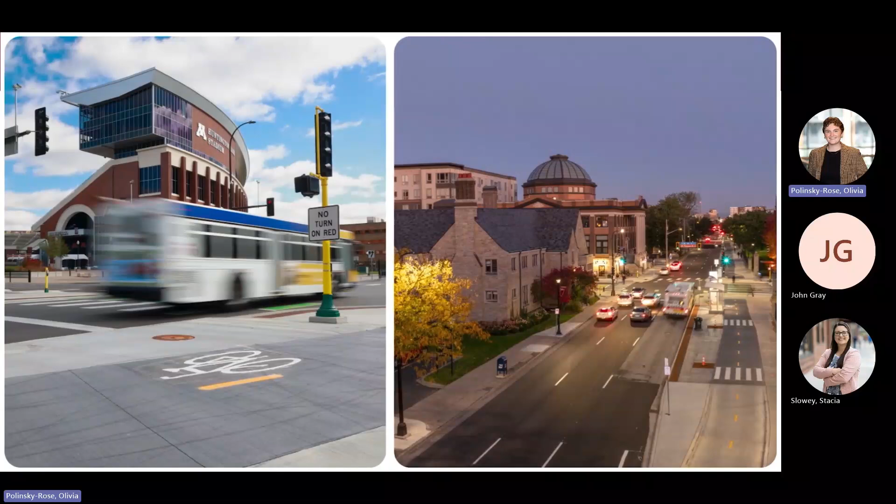So I'm going to go through the overview of the project as a whole, ultimately arriving at what the goals of the project were. Then I'll go into some more detail on the traffic components, the traffic analysis piece. I did dip my toe a little bit into some of the final design, not a lot — I wasn't really involved heavily in the roadway design piece of it. And with a project this size, I was scratching my head at what the right number of key takeaways were. I came up with a few, so we'll go through those at the end.

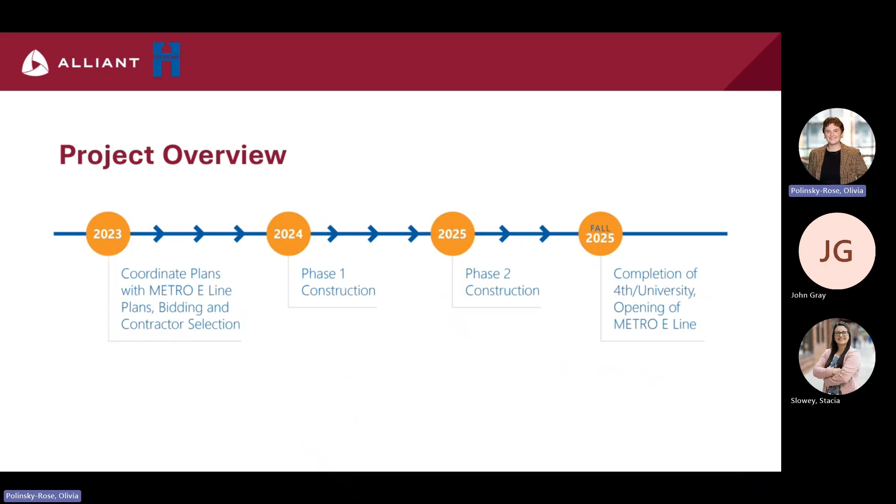So I talked about those existing conditions, just maybe hinted at it a few minutes ago. I want to set the stage for at least what I was getting involved in when we won the project and were starting our preliminary design. So like I said, the first thing to see here...

Back in, I think it was 2012 or 13, I was looking back at street view. The city painted on-street bike lanes, but they weren't protected in any way. They weren't delineated with particular delineators or anything. So given the volume of users out there, it seemed to be a fairly uncomfortable facility. That was one of the driving factors behind the project.

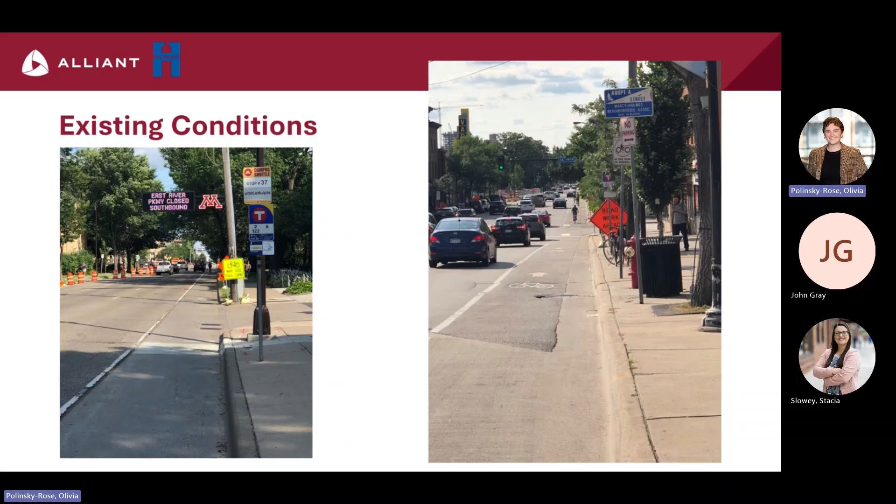The next thing is that there are spots along these two corridors that didn't have ADA compliant pedestrian facilities. These are wonderful examples, I guess, but you get the picture that everything out there is just kind of dated, needed to be refreshed.

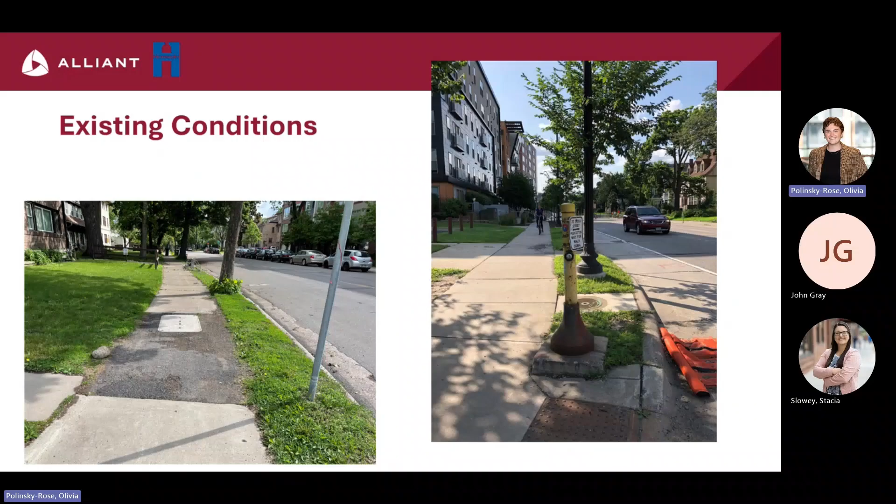This really surprised me when I did a field visit to scope out the extent of the condition of the traffic signals. I came across the pole base here on the right. I could put my whole hand in through the underside, and if I wanted to grab the wiring in there, I could. Not the safest thing out there, that's for sure.

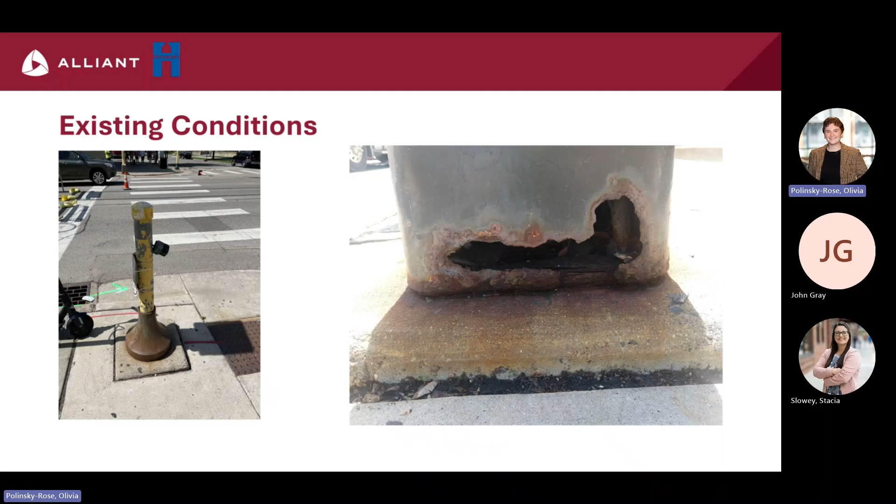A lot of these signals were built in the early 90s, so they're pretty much at the end of their useful life. So not surprising that we want to come in and replace a lot of those.

The last thing is with a corridor of this age, you can have a lot of portions of the roadway that don't have great pavement or even curbs and that. Certain places are kind of a checkerboard of pavement patching and rehab that certainly could use a refresh.

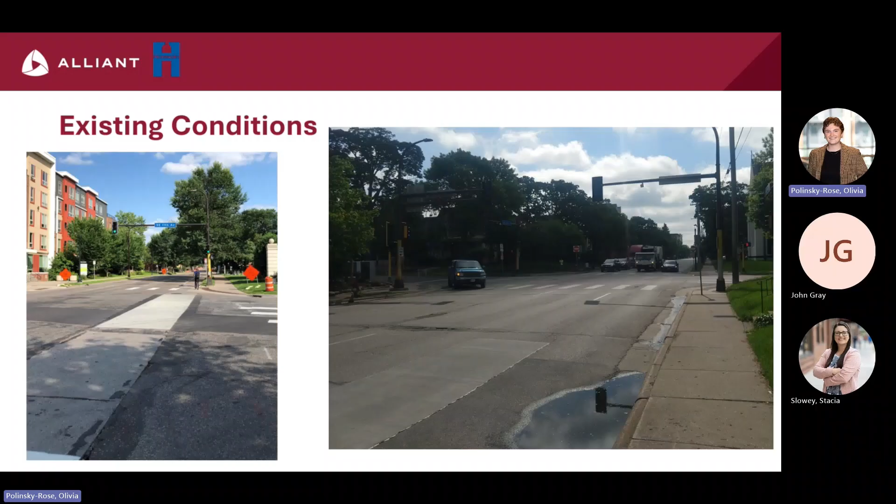Obviously, with this being outside of the University of Minnesota campus, you're going to find a lot of different transportation modes. Of all the projects I've worked on, this has by far had the most complex number of transportation modes. The picture here, I love this picture because you have probably about three-quarters of them.

I think the point here, though, is that all these different modes mix between being on the roadway and being on the sidewalk, or being on the bicycle facilities that were there before we started the project.

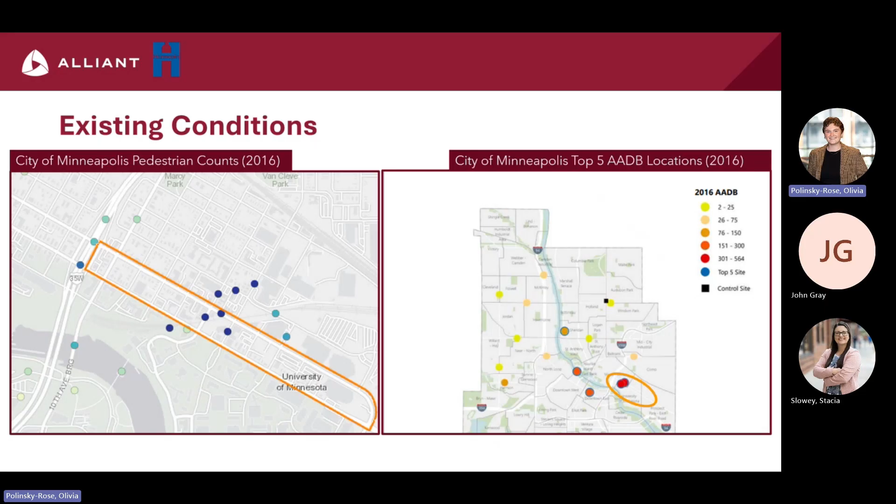Another driving factor behind this project was to provide connectivity to some of the other neighboring or intersecting bicycle facilities in the city, most notably the 10th Avenue bikeway, as well as the proposed future connection to the Oak Street bikeway. The proposed protected bike lanes on University and 4th would provide some of that connectivity for those users.

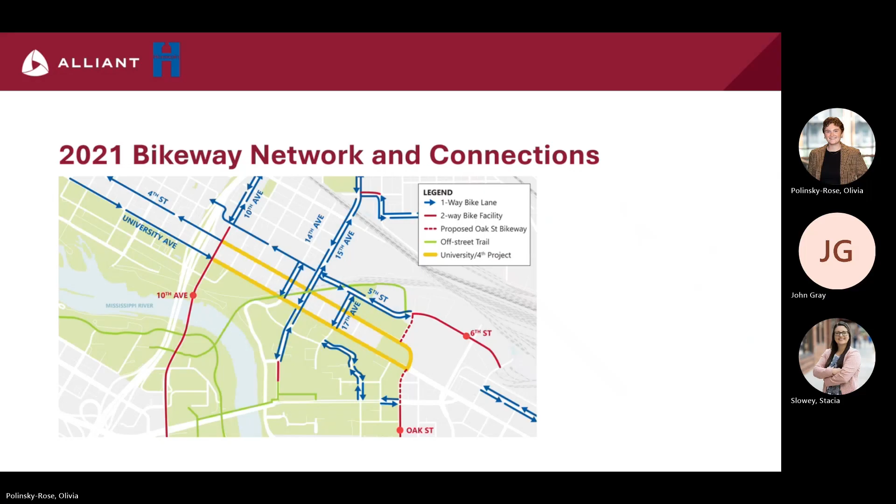Like I said earlier, going into the project, the county knew that Metro Transit was planning to operate the BRT along University and Fourth. There were 3 proposed stations at the time - and when I say at the time, I mean the preliminary engineering phase. Obviously we know the E-line opened late last year, but at the time there were 3 proposed stations along our 2 roadways. So we had to work closely with Metro Transit to include the BRT in the traffic analysis, and then ultimately incorporate some of the things Metro Transit needs for BRT in the final design.

So all this kind of culminates in what the project goals are. When I try to come up with these goals, it's pretty simple to say: we want to improve bike mobility, we want to increase access to transit, we want to enhance the multimodal safety of the corridor - all in balance with each other, with trying to retain effective traffic operations.

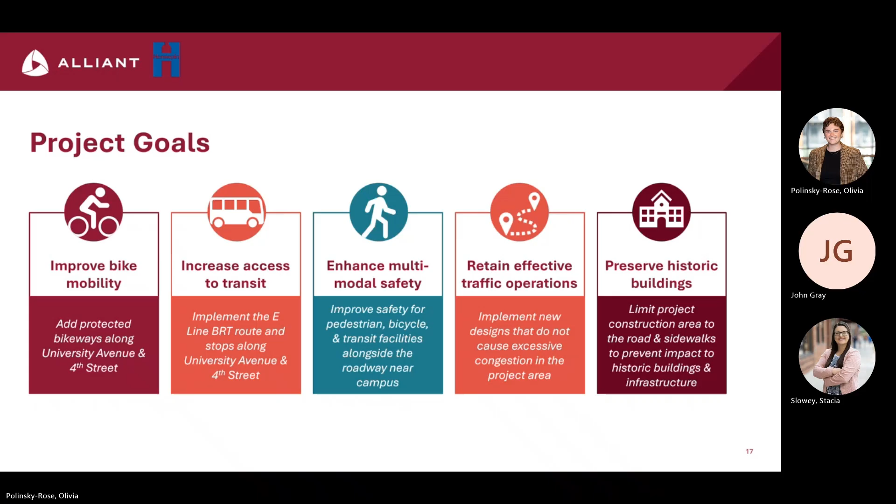So a lot of those goals really center around the complete streets concept. I found this picture that we took - I think in summer 2019 when we were pursuing the project. It really struck me how dominant the motor vehicle space was out there. On the right, I clipped the image of the city of Minneapolis's road priority pyramid, I guess you want to say.

Because these facilities were built or last reconstructed in the 90s, complete streets really weren't a big thing then. They did have facilities for pedestrians and bikes, but it was more auto dominated. This is a great example where you see that bus on the left at the bus stop actually encroaching onto the bike lanes that were there at the time. So in Minneapolis's priority of modes, we really want to try and provide more space for bikes and transit, maybe not have them competing for space if we can. Hopefully that makes sense about the complete streets piece of it.

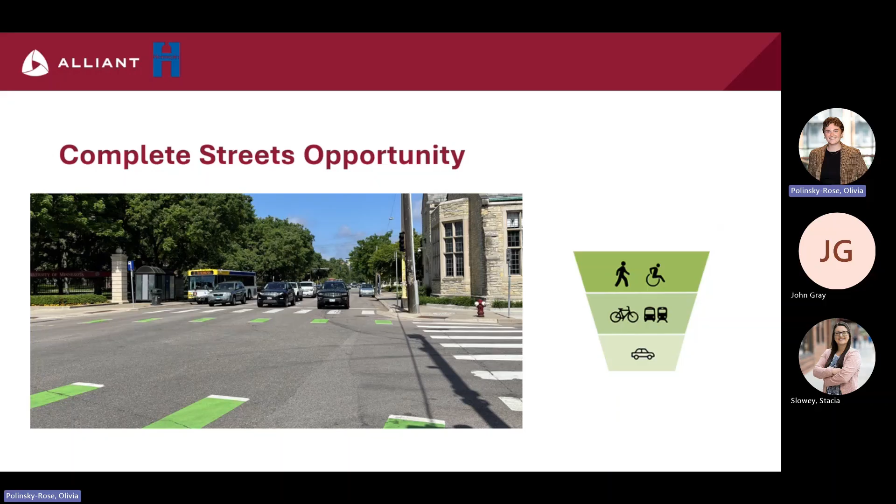We're going to come back to this here at the end. So I'm going to go through the traffic analysis, do this somewhat quickly, but we had a data collection component to this, a big traffic forecasting component, and then a pretty large component of trying to analyze alternatives.

So we'll start with the data collection. It's pretty easy, everybody remembers this time in 2020. I distinctly remember sitting at the U of M for the kickoff meeting right around this time, late March. It was mid-March, like 3 days later the whole world changed.

In my scope, I had asked to collect multimodal turning movement counts in like April. So we went out there to put our cameras out, and my data collector said, well, not a whole lot of traffic out here. I'm like, hey, right. That was a big deal.

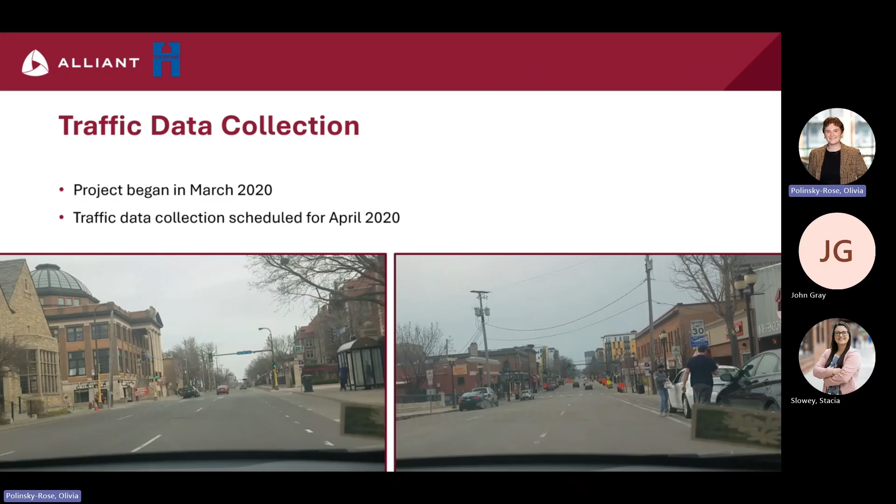In all reality, I had this person go out and just observe what was going on. He didn't have all the cameras. I knew it wasn't going to be what it normally is, but we kind of wanted to gauge if it was going to be worth it or not. It certainly wasn't. I think these pictures were taken around 9 a.m. on University, which usually it's really busy.

So we decided to try and pool together resources from the University, Parking and Transportation Services, the county, the city, or anyone else that had count data we could use for this. We were able to locate some historical count data from 2016 as a stopgap. We also pulled historical count data from the city, and when we plotted that out, it was kind of interesting to see how traffic volume out there was either kind of steady or slightly declining. That was a big point of conversation amongst the stakeholders.

What we decided to do was take the 2016 counts that we had and just increase them by 0.5% annually to get out to 2040, to have a conservative analysis. In all reality, with things declining out there and improving access to transit and promoting the bike facilities, it's probably going to continue to decline a little bit.

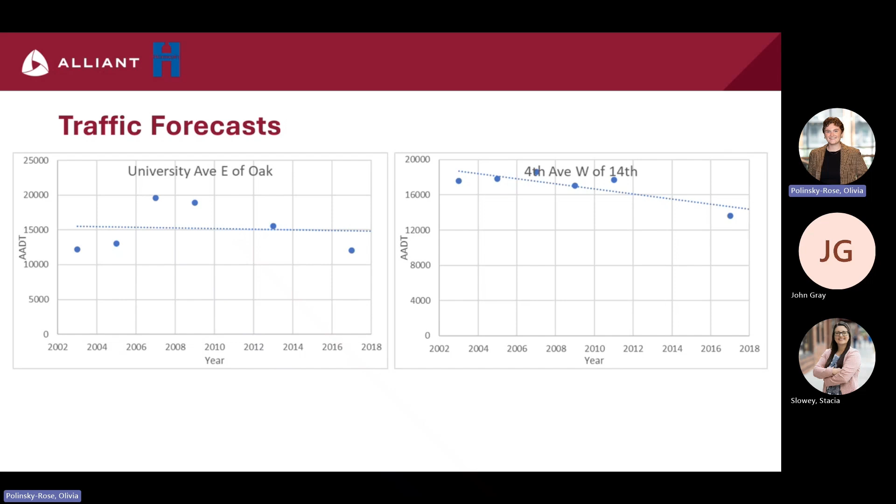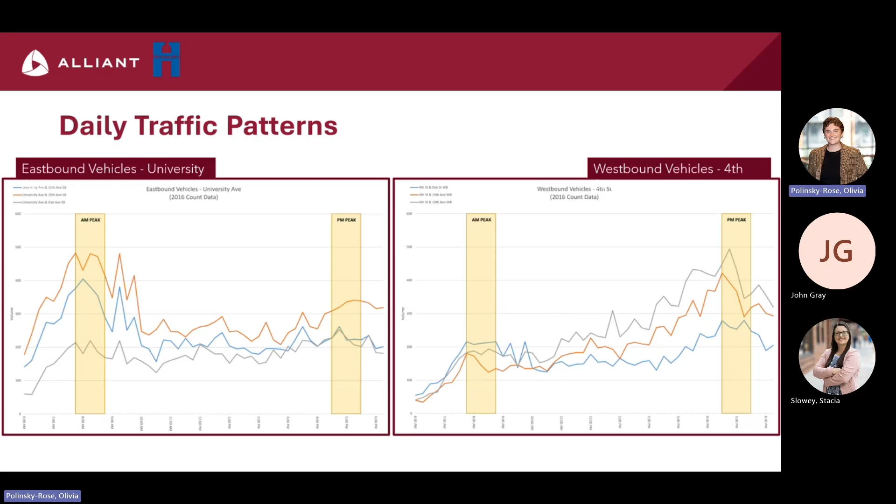What the takeaway here that I saw though was how University volumes tend to jump up very early in the day. They do drop off, but it kind of maintains a fairly steady rate. Fourth Street is a little bit different, where volume starts out pretty low in the day and it just creeps up throughout the day before it cuts off. So just a few takeaways on the traffic piece, traffic patterns.

The big thing here is when we got to the second alternative that we wanted to investigate, that was a lane drop at 15th. So the county and the city were interested in trying to do some sort of a road diet. They thought, well, maybe we can carry 3 lanes from 35W to 15th and then drop a lane at 15th and have 2 lanes continue to the east towards Oak.

With that particular scenario, we analyzed it in Synchro, and the model basically locked up. It couldn't even run because it was so over capacity. So I really said, well, maybe that's not a good idea.

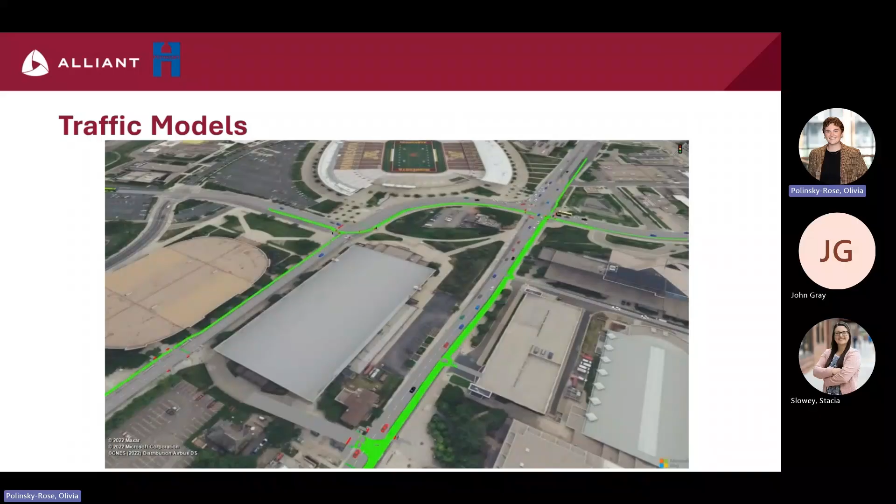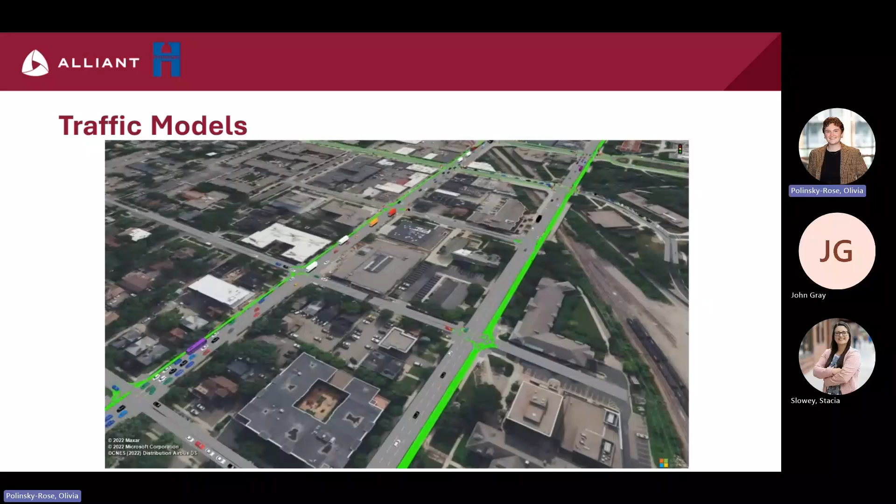Problem with Synchro, though, like everybody knows, is you can't model BRT, can't really model bike operations like this, and it doesn't handle a lot of pedestrians very well. It's really meant for vehicles. So we did Vissim to try and get a better handle on what we'd potentially be dealing with for the proposed alternative. Vissim is very user-intensive, a lot of inputs have to go into it, but the more effort you put into it, the better results you get out of it.

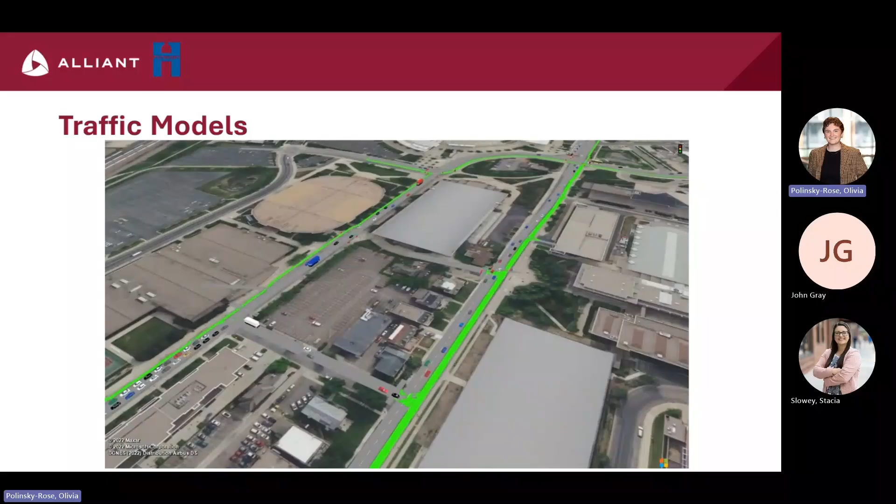It turned out pretty good, and we used this video for a few of the public outreaches we had for the project. So, the two-way bike lane.

There are a couple of considerations we had to think through with this. On one hand, it was a really great idea to start thinking about converting University in our minds from the one-way concept to the two-way, because the city and the university had noted there were a lot of contraflow riders in the bike facilities there before we got involved. So the two-way can certainly help those wrong-way riders, provide them a safe place to operate, and allow better connection to the other bike facilities I mentioned before, as well as those university destinations.

Challenges though, safety is a huge thing. You're dealing with contraflow of bikes with a really busy street right adjacent to it. Certainly invites a lot of opportunity for conflicts, and the intersection operation is kind of complex.

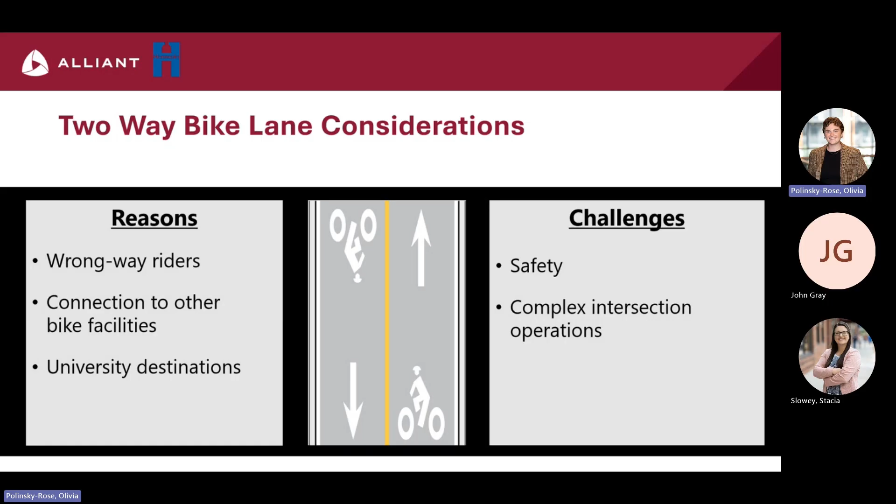The first was to essentially do nothing out of the ordinary that we would normally do, aside from providing a few red, yellow, green vehicle-type indications for contraflow bikes. So if you're going in the direction of vehicle travel, you'd see the regular vehicle indications and ped indications. For contraflow, you'd see vehicle indications and the complementary ped indications.

The second option we thought of was to incorporate bike signals, bike indications. It'd be very similar to option 1, except instead of having red, yellow, green indications for the bikes, we have red, yellow, green bike indications. The way that would operate per the MUTCD would be to have vehicles accommodated through signal phasing, and then have the bikes be in their own exclusive phase, because you can't have a green bike indication on with a green ball.

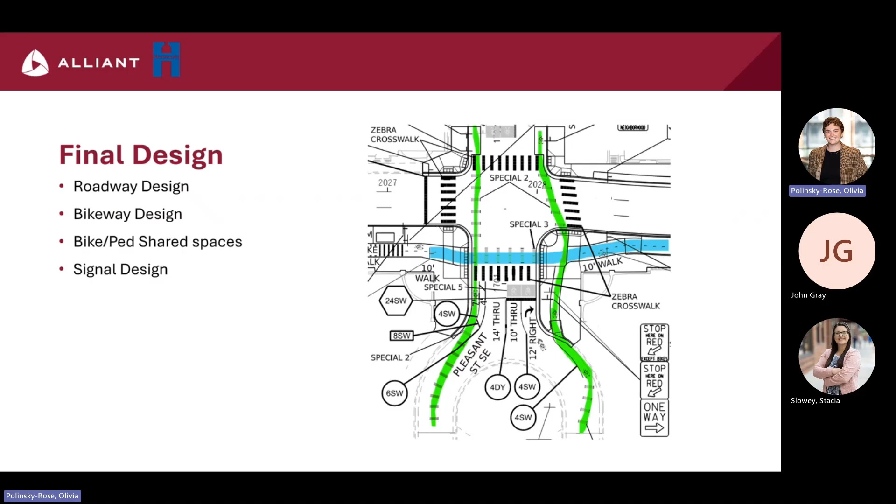So I'm going to move into final design. I thought I had a picture on the slide — I guess it's missing. Oh, there it is. Okay, we're going to go to final design. I'll talk quick about the roadway design piece, bikeway design, some of those bike-ped shared spaces, and signal design.

So we fast forward into final design, trying to figure out all the dimensions for all of our elements. We ended up with 3 travel lanes for University — it seems like almost every block has a different cross section. With the 3 travel lanes, we have the two-way bikeway on the south side, 10 feet wide with a 2-foot buffer, and then we have those 6-foot sidewalks.

We also have 4-foot boulevards on either side. We were kind of going between what the county really wanted for a cross section, what the city really wanted, and what the state aid minimums were for all these things. It's kind of a circus, but this is what we ended up with for University.

At locations where there's an E Line BRT stop, we've eliminated the boulevards on either side, and slightly widened the bikeway and sidewalk to squeeze in about a 12-foot wide space for the BRT platform. So we have the two-way bikeway at 10 feet wide, remove the boulevards to fit in the platform, and then a sidewalk that's 1 foot wider. It gives you a sense of scale of how you're trying to fit all this in — it's really kind of a puzzle.

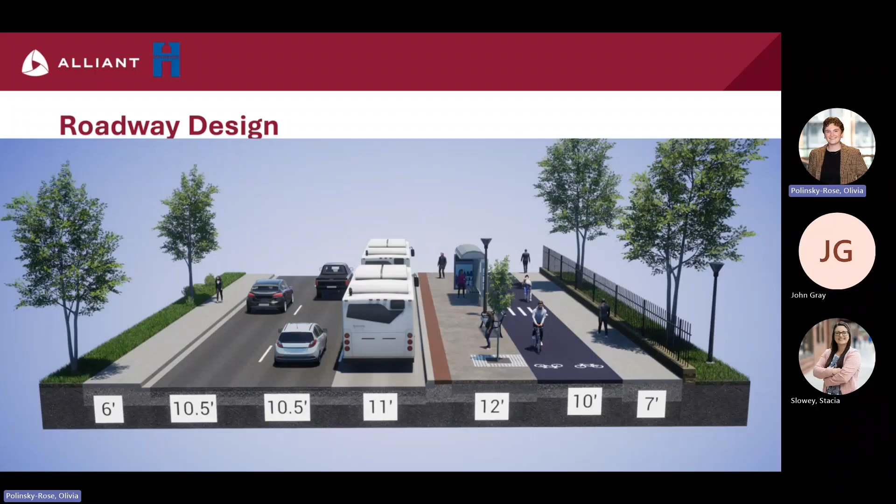For the bikeway design, the two-way bike facility is generally about 10 feet wide on University, including right behind the bus platforms. There are a few short sections that are 8 feet wide, 12 feet wide, and even 15 feet wide. The one-way facility on 4th is 6 feet wide.

So we applied a buffer curb design that I've got a schematic for here, and then I'll show some pictures of what it turned out like. That buffer is 2 feet wide, placed adjacent to the travel lanes.

This section of curb was somewhat modular, so we could provide gaps for people on 4th Street who parked on-street to be able to cut across the curb and get to the sidewalk.

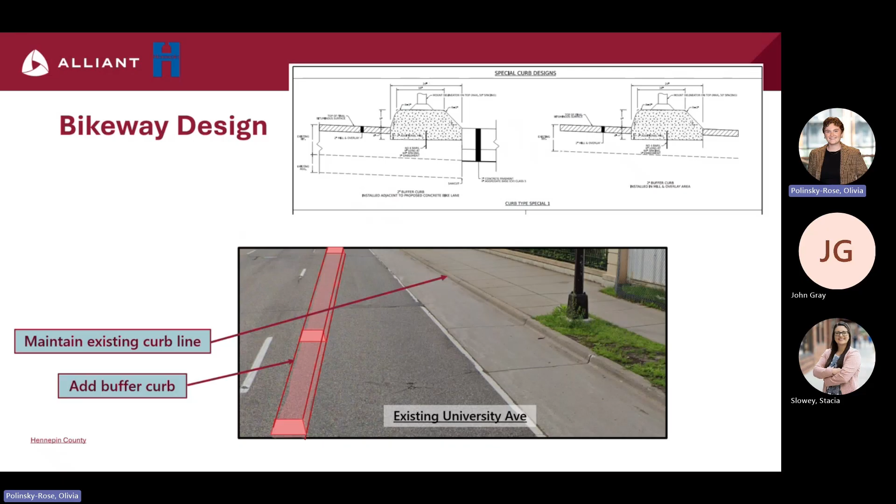Now it looks like this. So I'm talking about these gaps right here in that modular curb design.

This is just another view of that modular curb design for protection for the bike facility.

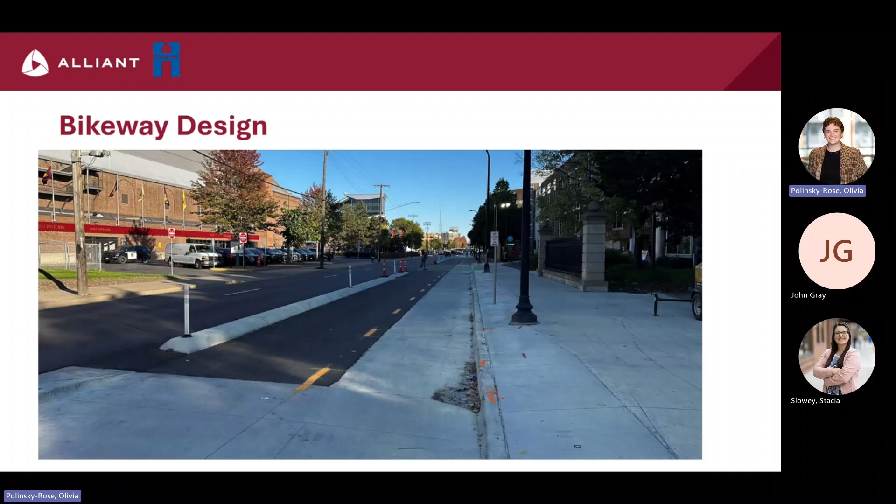There were a couple driveways that intersected the 2-way bike facility, and we went round and around with the university, the county, and the city as to how to properly mark and sign those so vehicles in those driveways would not cause a safety issue, being surprised by somebody coming from the right or left.

So what we ended up with were some yield to pedestrian signs in a few spots, and then we put the green bikeway markings across the driveway. This is at the grade of the driveway, so the on-street facility had to ramp up to be at the same grade as the driveway.

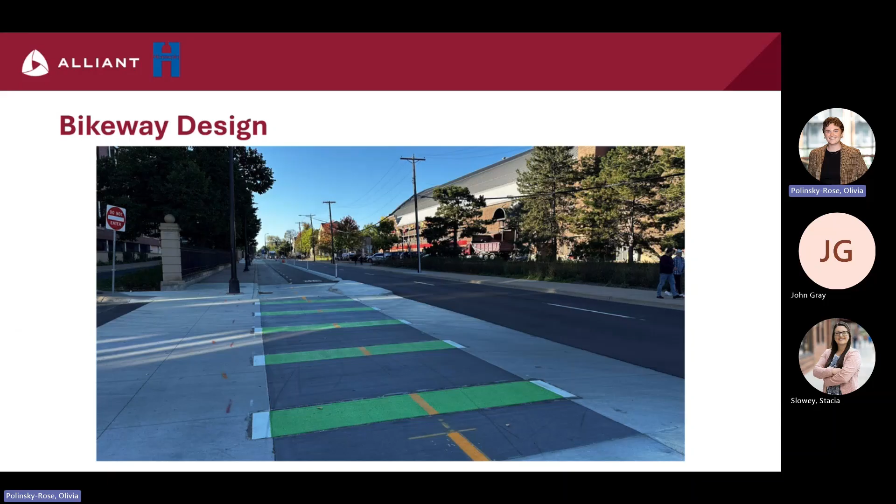One of the goals of the project that we were talking about earlier wanted to improve the shared spaces for bikes and peds. I thought this picture is really cool, right at the epicenter there at University and 15th.

So the design we came up with accounted for these shared spaces by having colored concrete for some of the bike facilities, really wide crosswalks, brought the curbs out to maximize the space for pedestrians, and really tightened up the curb radii to maximize that space even more.

So all in all, you'll see a comparison here in a second. I think we really accomplished that with this project.

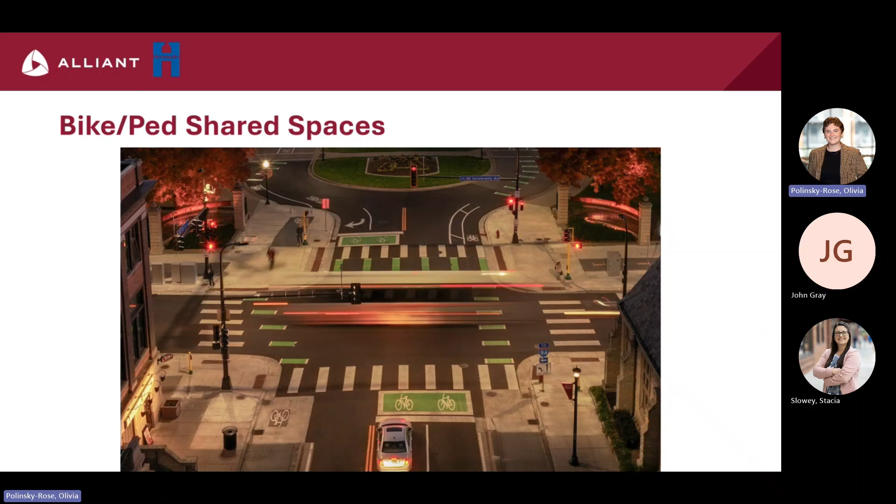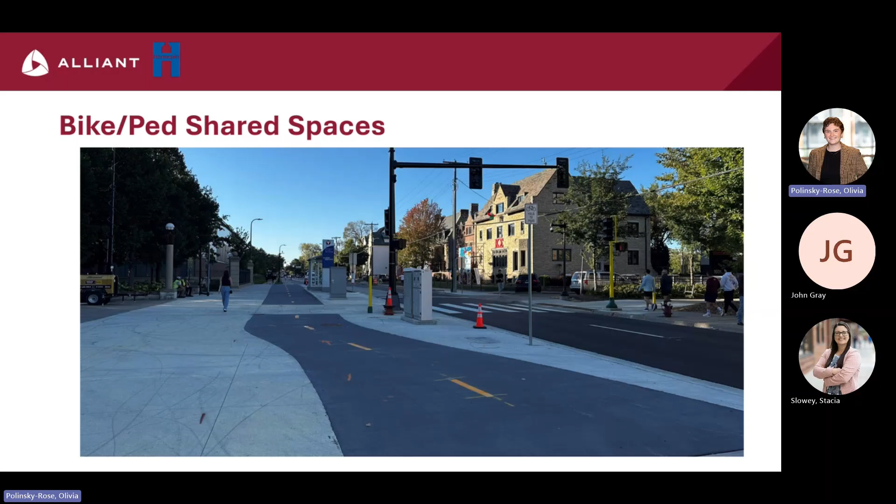This is another image showing that colored concrete for the bike facility down towards, I think, 19th, over by the field house. This is where we dropped to 2 lanes, so there's a lot more real estate to really increase the space for the bikes and the peds.

For signal design, there are 16 signalized intersections. Myself and another colleague from Alliant went out one day in spring of 21 and walked the whole corridor, took inventory of the condition of the signals, and figured out we really needed 12 new signals entirely, and 4 of them we thought could be revised, salvaging what was there and bringing in some new parts.

The project also included installing interconnect along both corridors, and quite a bit of roadway lighting improvements throughout.

So the final engineer's estimate at the time of the regional solicitation application was about $10 million. When the dust all settled, the price tag was coming in around $14 million. There was some gap that stakeholders had to work out amongst themselves as to whether our mouth was bigger than our stomach.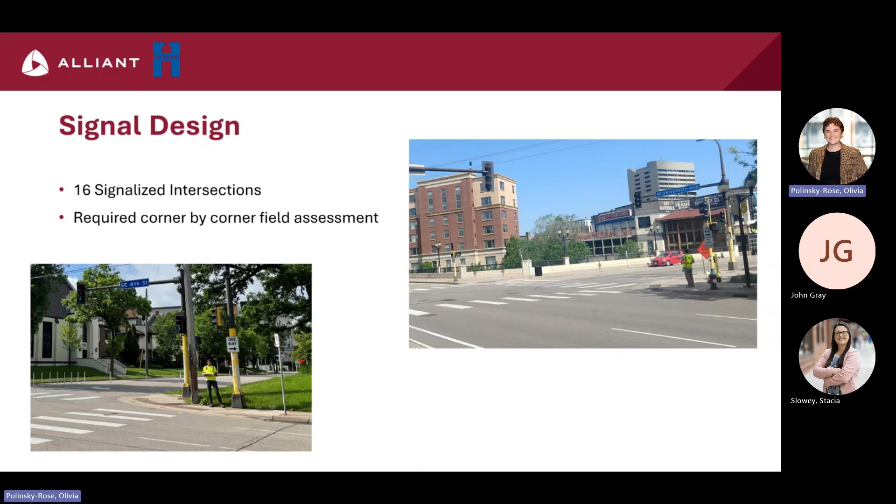So construction was completed in 2025, and then the E-line opened in 2025 as well.

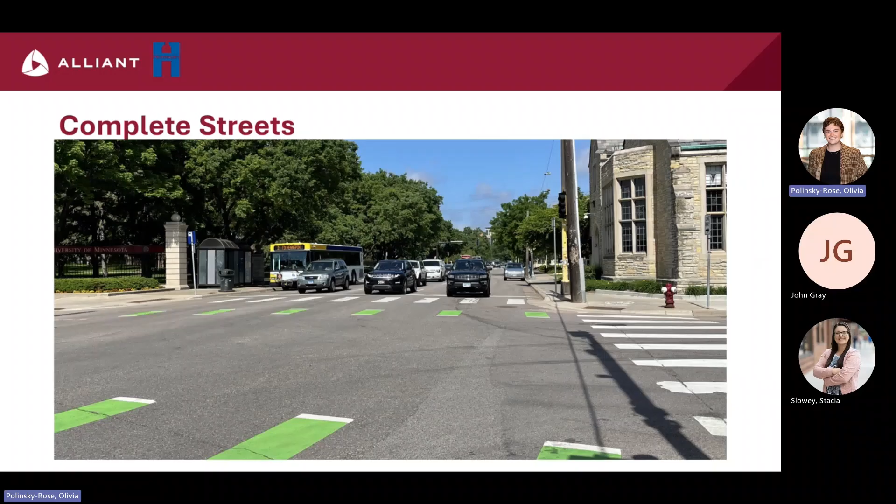Instead of the parking lane, we've widened out the sidewalk on the south side and provided space for the bike facility. Now the bus is sharing space with one of the vehicle lanes. Still not great, but we tried exclusive transit lanes and that didn't get anywhere back when we were doing the alternatives analysis.

And then you can see these corners, with the tighter radii, curb extended out more, really trying to maximize the space that we had at each of the corners.

Okay, so those key takeaways I was alluding to earlier. The first is we had a large number of stakeholders with this project, and from the time I got started in 2019 until this was built, late 2025, that was 6 years. So there were a lot of things along the way that we documented as far as decisions reached through PMT meetings or other stakeholder meetings.

However, there are plenty of things that, thinking back in 2021, well, I don't need to write that down, or what am I going to need to look back on this for? Well, 3 or 4 years later, here we are trying to rehash the same conversation. I wish I had a little bit better documentation in certain aspects of this project, I think, for sure. That also makes it easier to prepare for a presentation to you guys 6 years later.